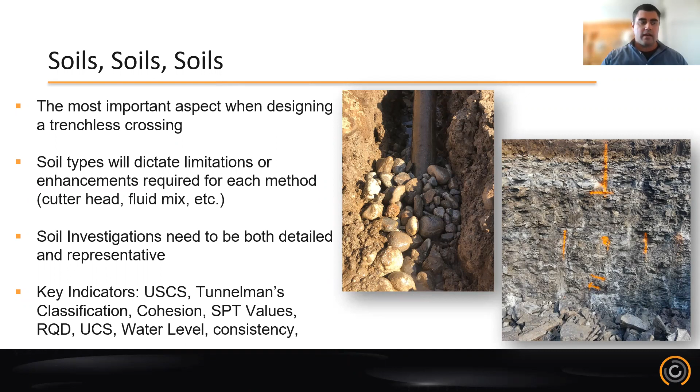There's a lot of key indicators that you get from a geotechnical data report, such as soil classification, Tunnelman's classification, the cohesion level of the soil, the hardness of the soil, whether it be through SPT values or RQD and UCS values, where the water is, and what sort of consistency you have. So it's very important to have that information when you're starting the whole project, and as you work towards getting to the point of designing or construction, having a strong and confident knowledge of your soils is very, very important.

So one of the things I really wanted to focus on there is the USCS versus Tunnelman's classification, because the Tunnelman's classification, first developed by Terzaghi and then modified by Heuer in the last century, was designed to help big open face tunnels and how those conditions will impact those big tunnels.

So those classifications are typically just passed down to smaller utility trenchless applications, whether it's directional drilling or auger boring or microtunneling. And while they do have a lot of carryover, they're not always applied properly because sometimes they don't directly relate. So the Unified Soil Classification System is a really good way of describing what soil type you're dealing with and the typical attributes of those.

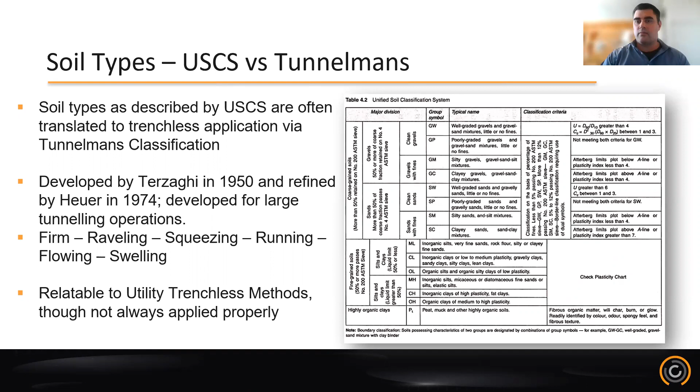And that typically meshes with the Tunnelman's classification, but when you do have a difference between the two, they don't always mesh up. And then when you're utilizing different technologies, whether it's designing your cutter head or picking your drill fluid, you have to anticipate both of those to put them together to get the right product and the right system for your trenchless crossing.

So in any situation, there are certain combinations of soil types that can be problematic. Just going by the USCS or just going by the Tunnelman's classification, it may seem like the soil conditions are pretty good. But if you combine both together, you realize, hey, I have this soil that has a high blow count, so it should be stable. It's a non-cohesive material, but if it's wet, it may be running.

But again, if you're dealing with a certain type of trenchless technology, whether it be directional drilling, microtunneling, auger boring, pipe ramming, then that could be a good thing, or it may be a bad thing. If you're auger boring, if your soil's raveling, it's a bad thing. But if you are microtunneling and you have a raveling soil, it could be a good thing because you might be expecting faster advancement rates.

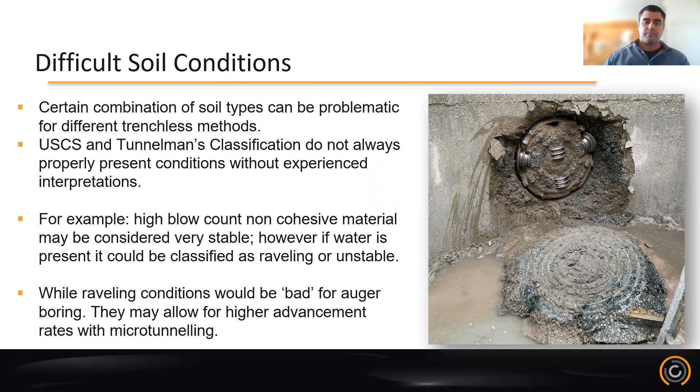So from that, I just want to segue into the different major new installation technologies and how those technologies are impacted with good conditions and where their pitfalls are in bad or difficult conditions. So HDD is great in homogeneous material. You can deal with a difference of material, whether it's going from an overburden into rock or going from a softer, siltier material into a harder clay. You can utilize conductor barrels to make that transition.

The only real pitfall with directional drilling is when you have lots of loose cobbles and gravels or boulders in your alignment, especially with on-grade shots or relatively tricky alignments. Auger boring, you need a stable face. There are a lot of add-ons that you can add to auger boring, pipe ramming being one of them, but there's guided boring, SBU heads, all this stuff you can add to enhance the installation method to make it work in different soil conditions. And I'll touch more on that in a couple slides.

And then finally, microtunneling is great in almost every ground condition, as long as you have the right tooling and fluid management plan. There are certain conditions that can cause issues, which I'll touch on when I get to that slide. But generally microtunneling is the best at handling any sort of combination of soil conditions. However, it comes at a price.

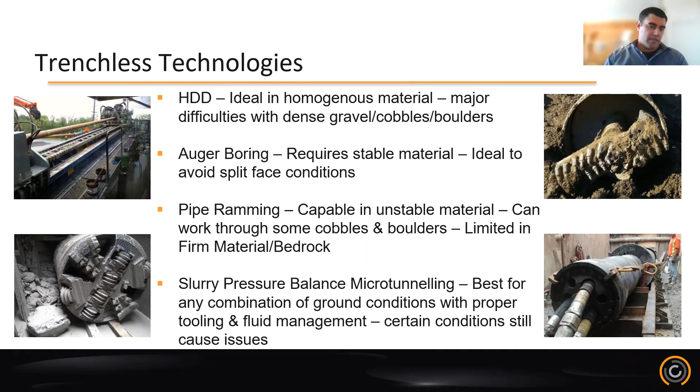So more detail on directional drilling. Directional drilling typically uses drill fluid, which is usually made up of bentonite, to support the bore path and move cuttings. It's great in homogeneous conditions because it allows you to drill consistently and move that material without modifying things too much. You run into a big problem with directional drilling when you're running into cobbles and boulders and other obstructions, whether they be natural or man-made.

And so this short video I'm going to show you is an example where we were drilling for a new water main in Richmond Hill, and we encountered an obstruction that we originally thought was a boulder. With directional drilling, sometimes you'll just steer around it and the reamer hopefully will push it out of the way later. But we discovered that this much larger than expected boulder could not be removed by excavation due to all the shallower utilities. And so we had to dig a giant hole to get it out of the way. And I'm just going to play this video quickly, hopefully.

So the only way for us to get this boulder out of the way was for us to vac a giant hole beside where it was sitting and then drop it into that hole so it's out of the way of the actual drill alignment. So again, cobbles and boulders, big problems.

A nest of cobbles or even very, very clean, if you will, gravels can cause almost as bad of problems as large boulders, especially when you're dealing with grade sensitive crossings. So as I mentioned before, you can transition from two different materials, even though we prefer to be in homogeneous conditions.

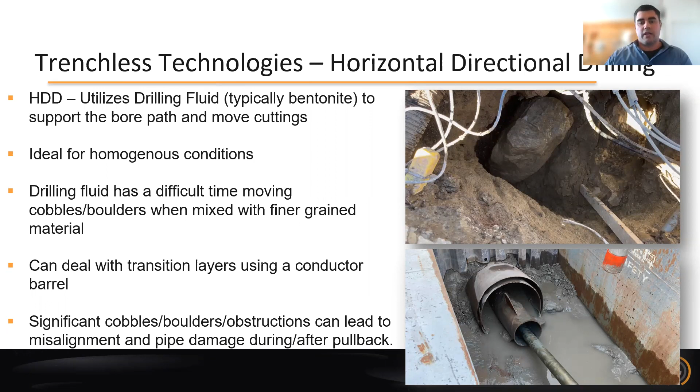So moving on to auger boring and pipe ramming. Auger boring is pretty good at dealing with most soil conditions, and you can use certain add-ons, whether that be pipe ramming to go into soft raveling soils or guided boring to go into grade critical shots that may cause your casing to drift a bit. And if you're into a hard rock situation, you could use an SBU head, which is great for cutting into rock. Using these different add-ons or enhancements to auger boring, you can get through most soil conditions.

One thing to consider, if you're not using an SBU head, it can get through boulders and cobbles, but they have to be at most 1/3 the size of the casing so that the auger can actually pick them up and bring them back through the tunnel. If you do have to deal with larger boulders or obstructions, then you have to manually enter the casing and remove them by hand. As I noted before, nests of smaller cobbles or smaller boulders can cause almost the same issue as a big boulder in the way.

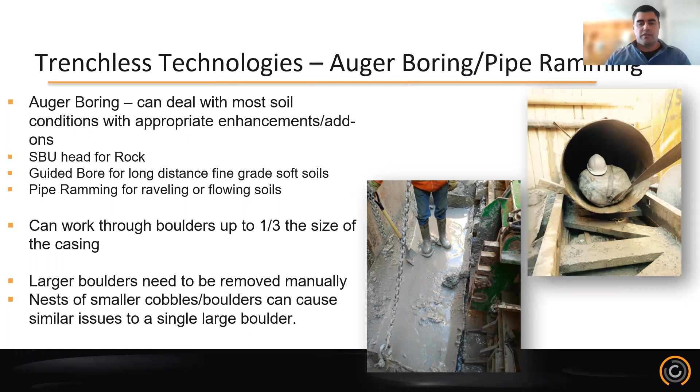Even with pipe ramming, usually the pipe hammer with the enhanced cutting edge on the lead casing can burst through boulders and cobbles. Sometimes if you're in really bad conditions, and this happened to us actually in Guelph a couple of years ago, the nests of cobbles were so bad that it folded the lead edge of the casing in upon itself, so that the whole bore had to be abandoned. Luckily, we were across the tracks at the time, so we just moved the reception shaft up a little bit and it worked out okay.

So finally, for microtunneling. Microtunneling is great at dealing with all soil conditions, assuming you have the proper cutting head and the proper slurry mix, and it depends what you're using and what situation you are in. Most of the time, you use just water to inject into the face, and then that material will mix with the cuttings and become a slurry. If you're in clay, you'll add polymers to break up the clay. Sometimes if you're in other sandy material, you may add some other material just to help float that sand out of the crossing.

So the main problems you run into with difficult conditions is when you're transitioning between soil types with microtunneling. Because if you don't have enough angle to punch from a soft material into a hard material, you may have to fight for a significant period of time to get that alignment where you need it to be. 99% of the time, microtunneling is done with very fine grade accuracy. And so making sure you hit that transition and you're not deflected by the soil is very important.

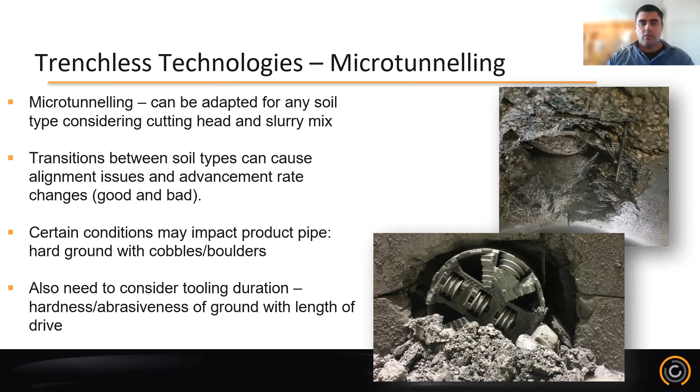Also, with the casing or the product pipe behind the microtunnel, you have to be aware that in certain conditions, if you've got, say, a hard ground with nested cobbles or boulders, they can be in a position where they pinch in such a way that they would crush concrete pipe if it's just straight reinforced concrete pipe. You can circumvent that if you have a steel casing where it just might only dent the casing, or you can do steel lined concrete pipe, which again works really well in very, very bad conditions.

So moving on to how do we get our soils information? Almost everyone here, I'm sure, has seen a geotech report before. They come in different varieties of quality and scope. Sometimes for certain developments, they don't consider a trenchless crossing and they just do their 6 or 9 or 12 boreholes all around the property to get a representative sample of whatever foundation they need for the building.

Sometimes the geotechnical reports are very specific for a crossing and they do boreholes at certain intervals at the appropriate depth, appropriately spaced away from the actual bore path so you don't have issues. And all the different geotech data reports are good information to have regardless of the quality, just because it will give you a representative bit of information that we as a contractor can base our recommendations on. It's always preferred when the boreholes go down to the depth of the crossing, and if they're close to the crossing, that's excellent as well.

So for the more, maybe complicated is not the right word, but the more trenchless focused project, we've seen a lot of geotechnical baseline reports in the recent past. These reports are great because they even out your bids. So in the geotechnical baseline report, it could say, based on these soil conditions and based on the experience in this area, you should expect to hit 5 boulders in 10 meters of tunneling, whatever the ratio is. And that's great because now we can plan for that and we can make sure we have the appropriate tooling.

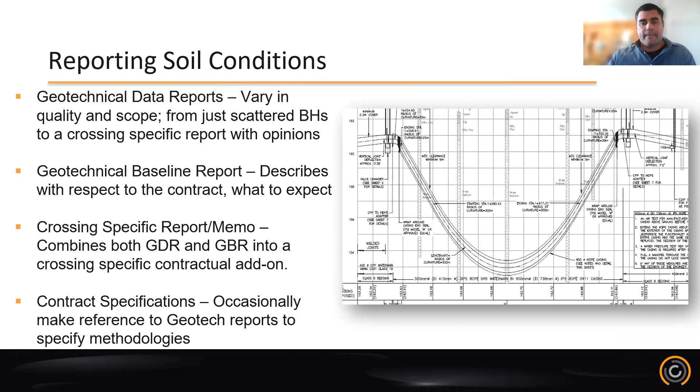So the last thing I want to talk about on the investigation reports are boreholes, monitoring wells, and test pits. Boreholes are great because they provide an awesome snapshot for the geological conditions and are good for quantitative data to say, hey, this is where the grain size analysis came back. This is what kind of blow counts you have, how hard the ground is. And monitoring wells are kind of a step up where, hey, we did a borehole. Now we're going to put in a monitoring well, check the water level. And so we can make sure we have a good representation of where the water is going to be, assuming the monitoring well is installed properly.

One of the things with boreholes is they're very small. They're 4 to 6 inches in diameter. They only provide a very small snapshot of what is in your alignment. And if you have that borehole right where it is, there could be a great big giant boulder literally 2 inches away from that borehole, which you'll never see because you just took that one little snapshot.

Also, boreholes are tough to provide good data on how that soil reacts. When you extract your borehole, you've got your case sample. Sometimes it's in a good condition, sometimes it's washed out. It's very tricky to determine and provide that information in a snapshot.

If you do provide test pits, then it's great to see how that soil actually reacts when you dig it. If you've got a great big pit, you dig a couple holes and you see it start sloughing in, you may not see that or capture it in such a way in your borehole log, where your test pit will show that really, really accurately.

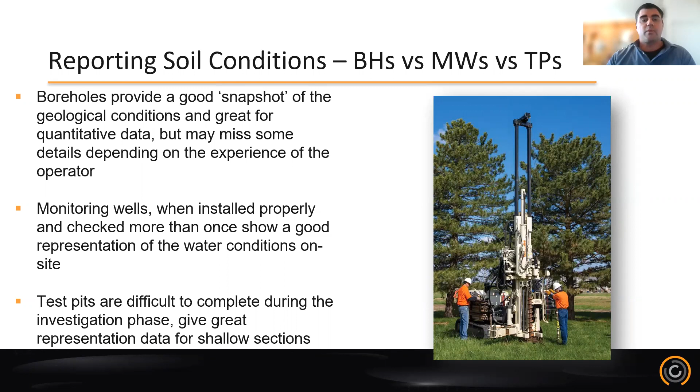So finally, I want to talk about differing conditions, because differing conditions can make things more difficult, or not, but it depends on the trenchless methodology and how you're dealing with the trenchless crossing in its entirety to see what the situation is. A lot of the times, because test pits weren't done, or you're dealing with areas that have typically never been dug up before, hence the trenchless crossing, the soil conditions here are a lot of the times unknown, or they could change for whatever reason in this particular section.

So when there is a change, when you're in construction and you've gone past the point of design, there are issues that need to be resolved. Those issues depend totally on what's in the way. Could be boulders, could be tons of cobbles, could be you found garbage fill, concrete, steel.

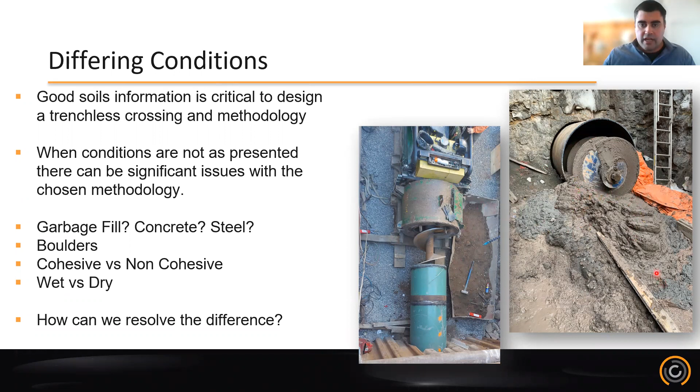You could run into situations where you've got nice dry soil, kind of like this picture here. We've got nice, beautiful dry soil here, but then we went a little bit further and we hit this super sloppy material that runs out of the casing and potentially creates a sinkhole. So how can we resolve these differences together?

So sometimes differing conditions are not that challenging. It's just a bump in the road. Maybe it's a little tweak to the methodology. Maybe we just have to keep the augers in and reverse them at the end of the day so the material won't flow. Or maybe we just need to trip out and use a different drill head on the directional drill.

Having that information and proving that information from a contractor is tough because it's underground. Sometimes you can't see it. For example, outside of a microtunnel machine, you can't really get there to see it. So how do you prove that these conditions are different? A lot of the times owners and consultants will say, hey, can you just do your own geotech report and prove to us that it's different? Sometimes those are good representations, sometimes they're not.

One of the things we like to say is, hey, just so you know, we're taking the world's largest borehole horizontally directly through the alignment. It's the tunnel. And having an understanding of how the microtunneling slurry separation system works, or how the directional drilling soil transfer works, or how the auger bore spoil buckets work, you can see why these conditions are different than what was in the geotech report.

And so going through that process can be a challenge because ultimately nobody wants to pay for this change, which is totally fine. The contractor doesn't want to pay, the consultant doesn't want to pay, the owner doesn't want to pay, but it's a different condition. It's not necessarily fair that this is now a change to the contract conditions, and working together with all parties can make everything a lot easier and better to get this sorted out.

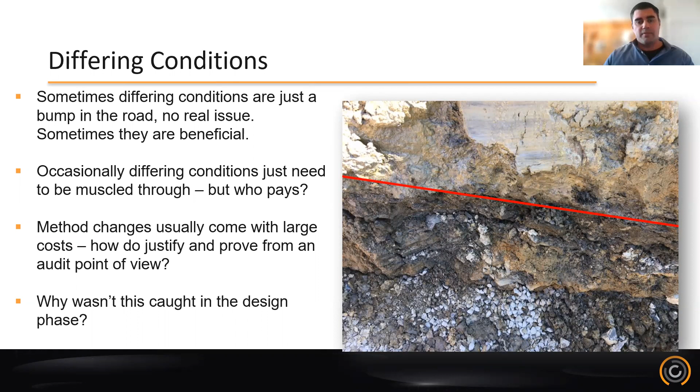This picture here is an example where this bottom layer is shale and this top layer is a silty sand, and the design had us working in silty sand for the entire crossing. But then when they excavated the test pit or the shafts on either side, they found we were half in the shale and the actual bore profile was right here. So we had to change our methodology. Ultimately, everything did not work very well because we were bound by specifications of a contract. And all in all, it was a challenging situation.

And so when we went in there to tunnel these, the entire tunnel alignment was filled with huge chunks of wood, and they were just massive fallen trees. And we had to go in with electric chainsaws and physically cut all these trees out of the tunnel alignment to get this in the right place as per the design. So again, these conditions were there. They would have definitely been identified by a test pit, but they were completely missed by a geotechnical bore log, and it was a huge additional cost just because of the change of method required to get these out.

So the take-home point of my presentation is all stakeholders need to work together to have a successful project when you have difficult ground conditions or when you have regular ground conditions. When you have a change of conditions, having that communication between all parties is very, very important, and it creates good things to happen when everyone can work together and come up with a solution together.

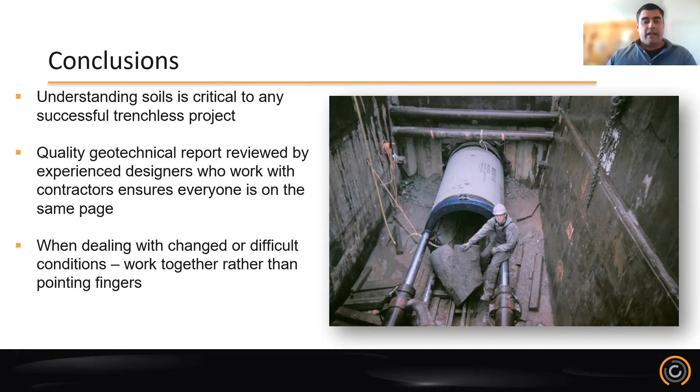Awesome. Thanks a lot, Kyle. And I can verify that the first question he asks me every time is, can you send me the geotech report? So that is 100% true.